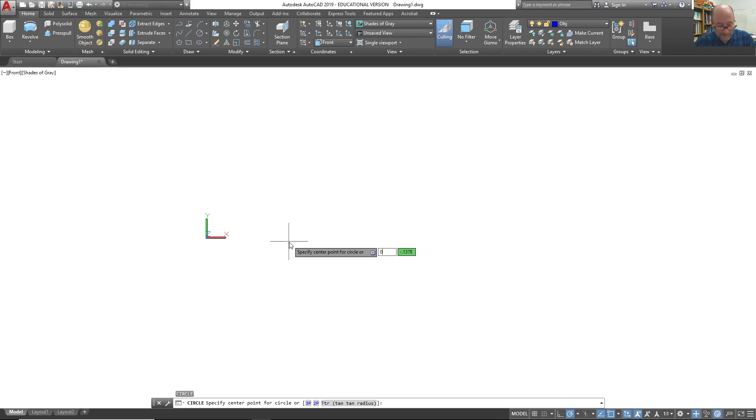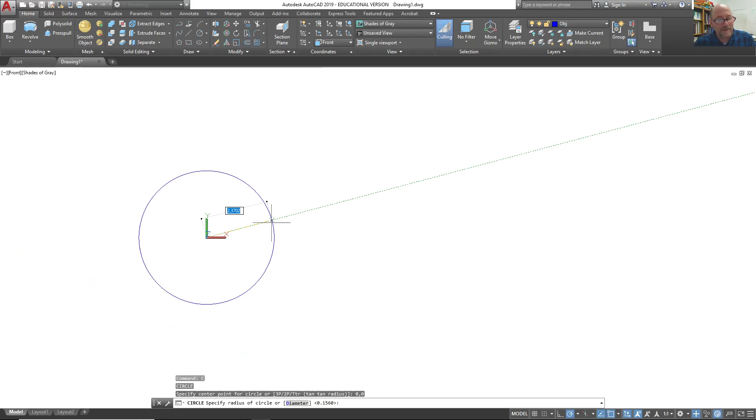In the front viewport, I'll start drawing some circles. I'll put them at the origin. This first circle is going to be the diameter of the left end, so I'll put the two left side diameters, the 1.05 diameter and the half-inch diameter, on the left, and then I'll have these three diameters on the right. So this one's 1.05, and the half-inch diameter.

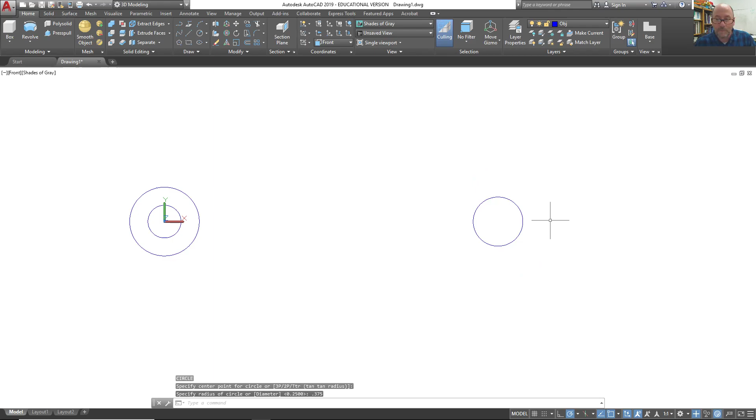Now this part is 3.5 inches long, so off to the right with my next circle, I'll give it a good 4.5 or 5 inches and draw 0.75. I think this was 0.625, and 0.312.

Now with the polyline, well, with the regular line, I'll just draw a 3.5 inch line so I have a place to start and end.

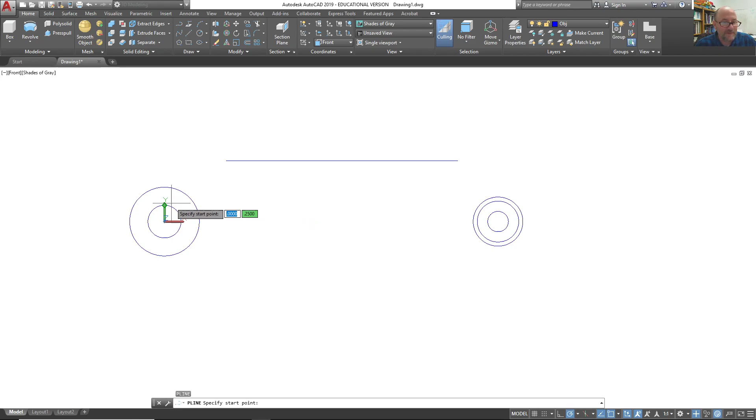And it's going to step down to the 0.75, or the 3/4 inch diameter, for 1 inch. And then it's going to step at 60 degrees. It says from the vertical, but really that's 30 degrees from the vertical, or 60 degrees from the horizontal, actually. And it's going to step down to the 5/8 diameter.

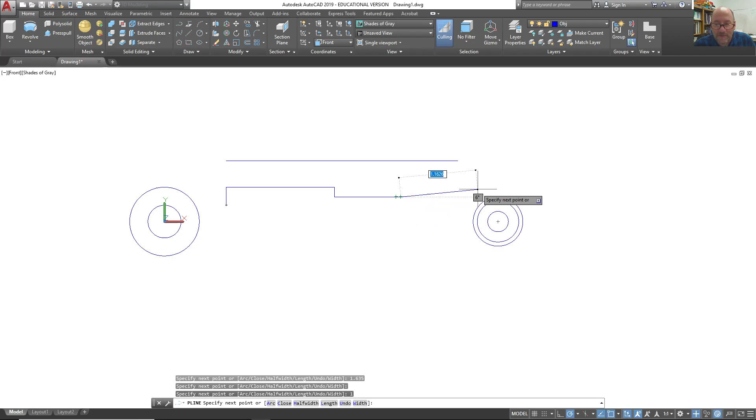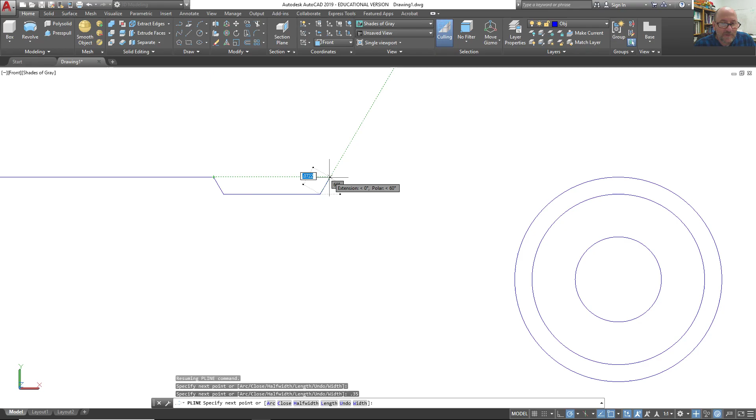Following, maybe zooming a little bit would help. Tracking along there until I get my 60 degrees, and this is 35 hundredths in length. Then it steps back up at 60 degrees, back to the original, and this is 8 hundredths. Stepping back down, and then off to the end, which I have right here.

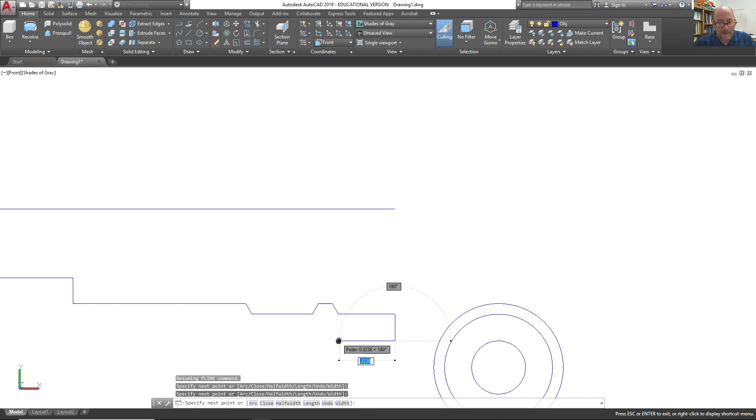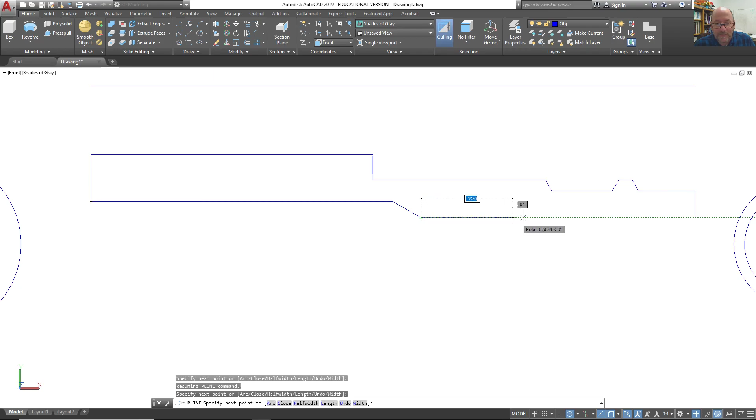This goes down to the hole. And this hole is, I don't know how long, I only have this 1.75 inch length to gauge that with. So I'll start again at 1.75, and this steps at 30 degrees from the horizontal to the 0.312 diameter, and then closes. So I need to join these two together.

There's only one other thing left before I revolve, and that is to chamfer the ends. This has a 45-degree chamfer of 9 hundredths, and this has a 45-degree chamfer at 6 hundredths. So, distance of 0.09, distance of 0.06.

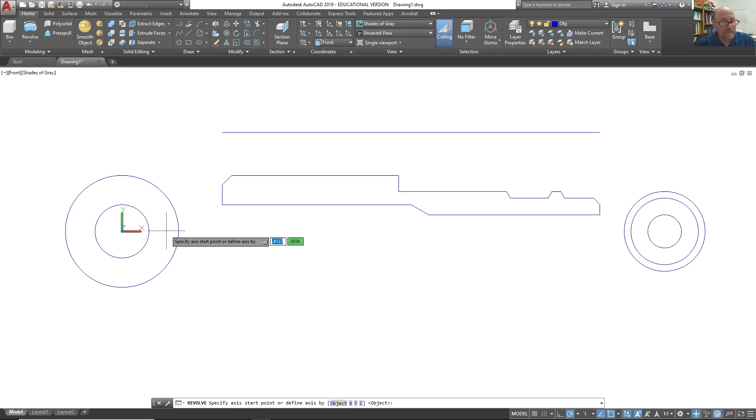There, I'm ready to revolve this part about the center line, that would be the center of the hole, for 360 degrees. And there's the round parts of the fitting.

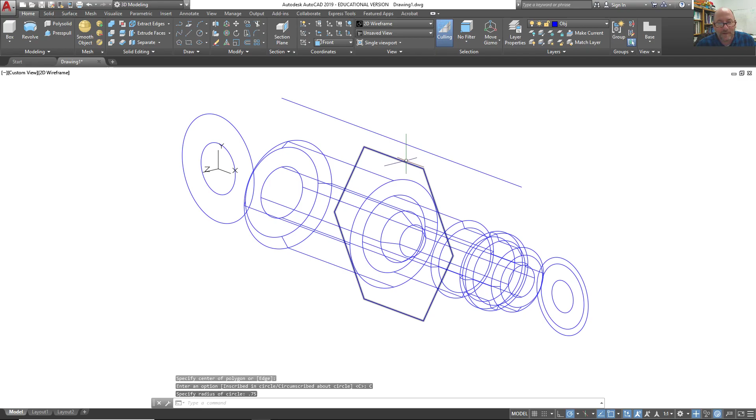Now off to the hexagonal portion of the fitting. If I use my polygon command, it may not be a very good idea to draw it this way because it's not going to be aligned, although I certainly could revolve it or rotate it. So that's 1.5 inches across the flats, so 0.75 inches this way, and at this point I want to rotate it 90 degrees so it's in the right place.

At this point, well, let me check it in the front view just to be sure. There it is. Now I'll extrude it back 1/2 inch.

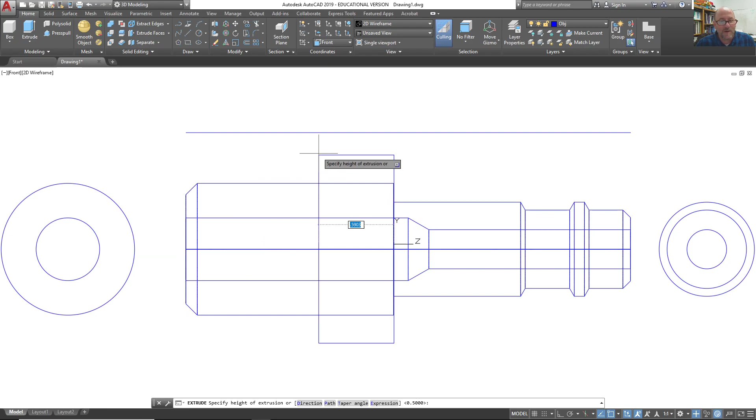And that is a 1/2 inch width of that hex nut shape. Now the shape is also chamfered, so the chamfer tool won't work for it because it's chamfered along a circle, not along each edge. So it's actually not chamfered at the midpoints of each side.

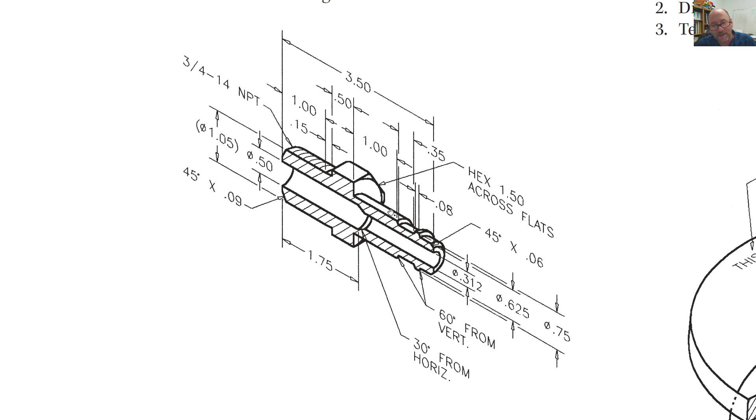The way to accomplish that would be another polyline. If I can track from the midpoint here at 120 degrees upwards, and then come down to any point here and track, go right to the top of the center. That would work, going all the way through. It doesn't have to go all the way through the fitting.

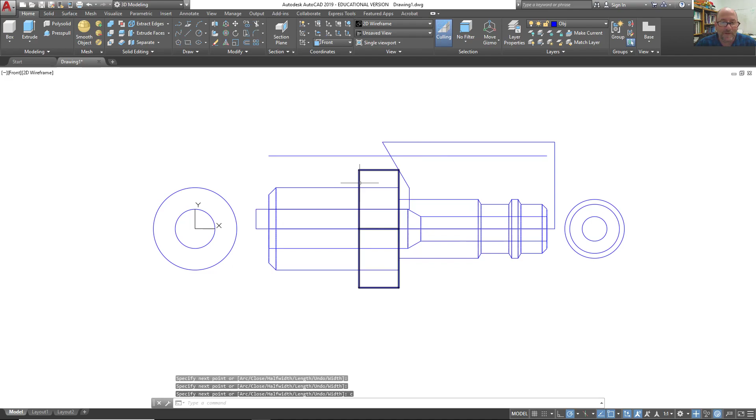In fact, I would rather hide the fitting on a different layer, but this will work too. Come back up. It doesn't have to be straight, but that works fine, and then close. So I'll go ahead and hide this fitting. I have a temporary layer for it, and then I can freeze that temp layer.

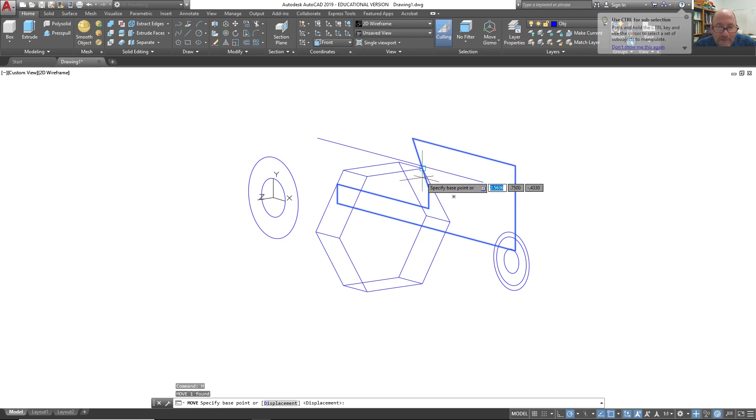So this shape here needs to be revolved around - well, I need to move it first to the midpoint. At this point, revolving this part will cut a hole, and subtracting it from the hex nut will cut a hole in the center of it and chamfer along a circle on the right side of this hex nut.

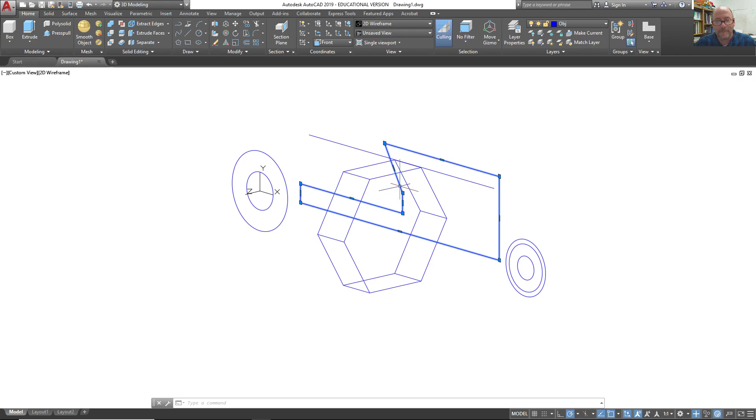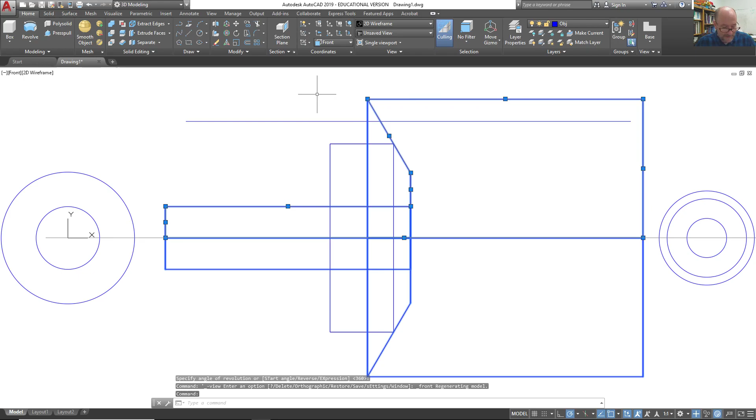I'll mirror this over. I can do that after - it can be done either way. So revolve around the center, and that's the shape that's going to be subtracted from the extruded hexagon. And I'll mirror it in the front view about the middle, so I can revolve, or I can subtract both of these now.

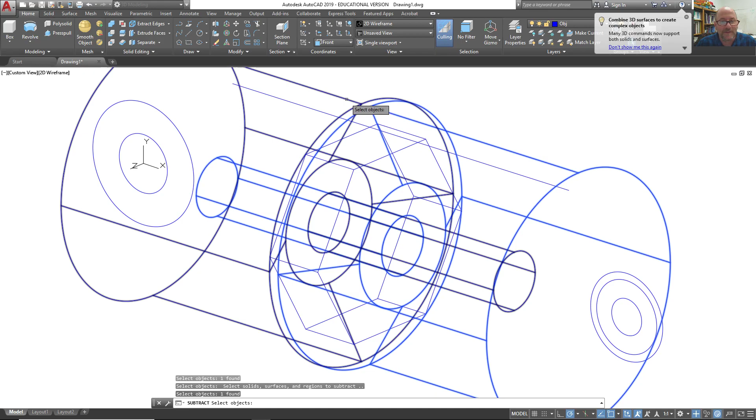So it might look a little weird, but this is what it looks like after subtracting. Kept in wireframe, it's a little easier to see how to select the objects. So there's the chamfered hex, the outer part of the hexagon, and the hole is cut into it. So a nice hex nut - this is a nice way to make a hex nut, by the way.

So now all I've got to do is turn on the fitting, solid union these two pieces, and there's my hex nut, or there's my fitting.

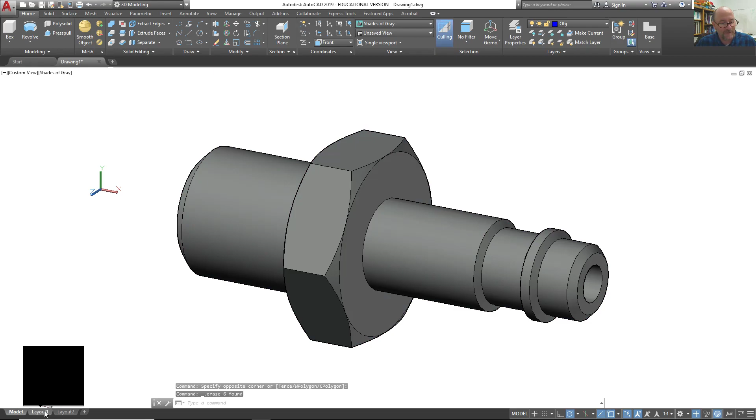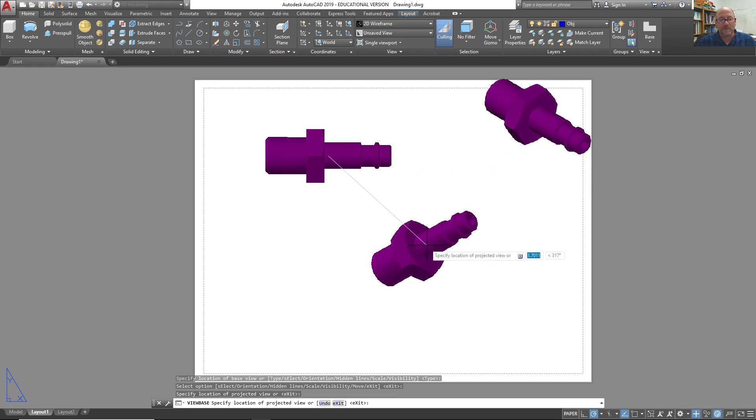The best way to dimension this and show it in a multi-view drawing is to make a full section of it. So if this is the top view, which makes a fine top view, I'll place it here, and I'll just make an isometric view of it as well, and that's all I'll make in there. But in the layout view, I'm going to add a full section view of this part.

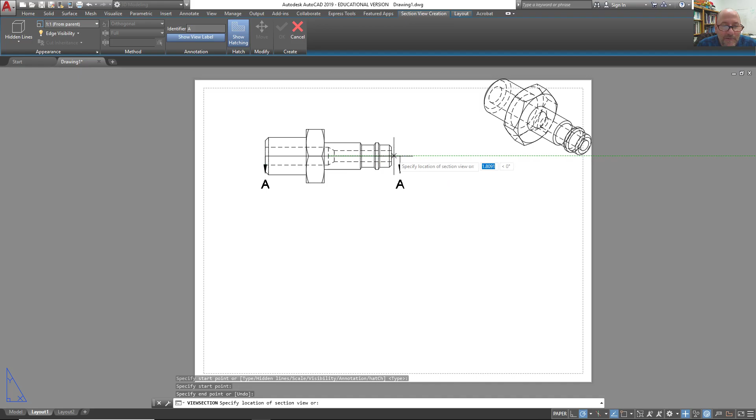Tracking, if I can track. Not sure why it won't do that, but that's okay. And there's the - just a bit more. There we go.

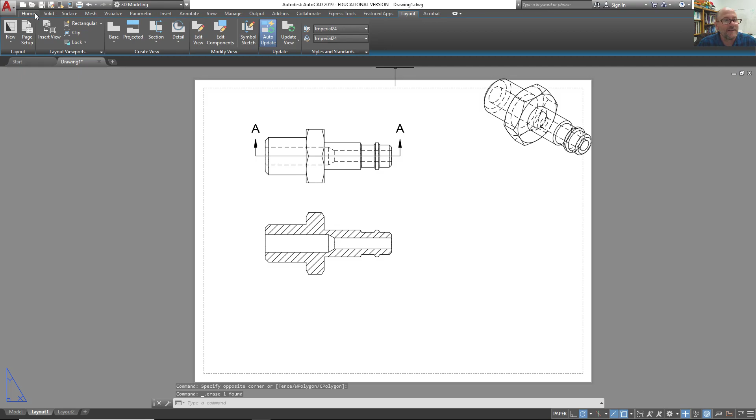And I can hide the MD annotation layer to not have to show the cutting plane because it's obvious it's being sectioned along its center. At this point, I can dimension the interior dimensions, such as this 30-degree angle and the 2 diameters of the holes, as well as the outer diameters.

Perhaps a right side view would be useful to dimension the hexagon, but that would be the only thing that would be necessary. I could put a leader to that hexagon and be done with it with these 2 views after dimensioning.

So there you have it. That's how a nice revolve can chamfer the hex nut as well as produce all the circular features of the fitting.